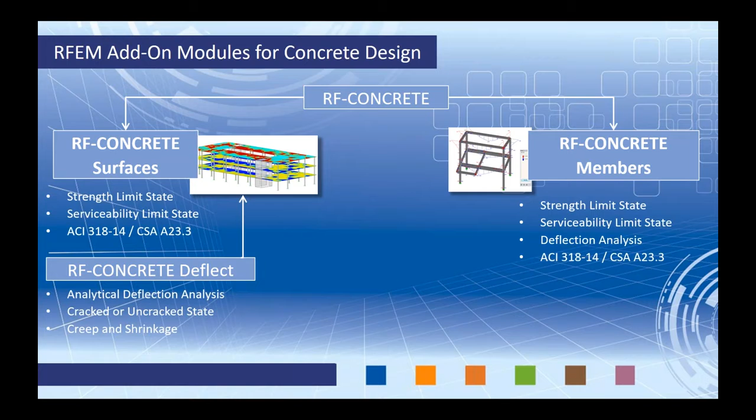Now, as I just mentioned, we do have the add-on module extension RF Concrete Deflect. RF Concrete Surfaces is required in order to activate this module extension. This allows us to take a look at the analytical deflection analysis of 2D surfaces in the cracked or uncracked state with consideration to creep and shrinkage.

And finally, we have the module extension RF Concrete Nonlinear. This is applicable to both the surfaces and members module, and this allows us to run a nonlinear calculation for the serviceability state only in the crack state. So we won't be using analytical equations or factors, but we'll actually come up with the crack section properties and rerun this within the stiffness matrix to account for those nonlinearities. We won't be getting into this today, but keep in mind that's a possibility if you're looking for it.

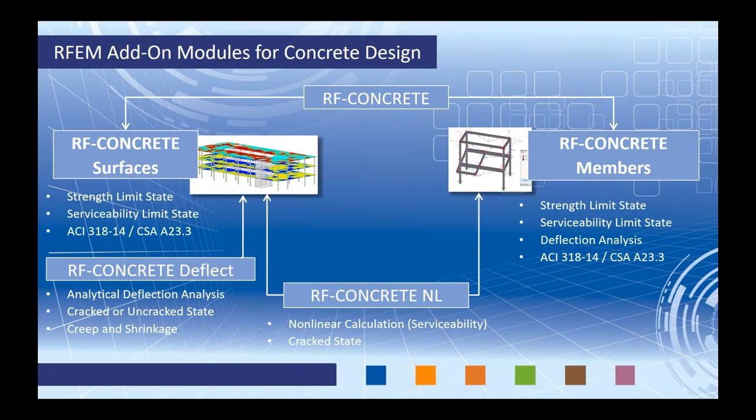So we are ready to jump into our example today within RFEM. For the sake of time, we won't be able to model the structure from scratch, but rather I went ahead and created this two-story concrete building.

You'll notice that we have several surface elements. The surface elements comprise our elevated slabs at both the first level and our roof level. Now, those same 2D surfaces are also utilized for wall elements, and you can see these in the vertical direction.

Surfaces allow you to apply any type of opening within them. So you can see this might be some type of garage opening. We have openings for our doors, for our windows, and for our stairs, and this is all accounted for within the analysis.

You'll also see these light blue symbols located at the joints where our vertical walls intersect our elevated slabs. So what exactly are these? Well, this is what's called a line release.

A line release can be placed on any line element within the model, but in particular we've added them at this joint where the walls intersect the elevated slabs. The line release type, if we open up the detail settings here, has completely released the moment, so we will not have moment transfer at that joint.

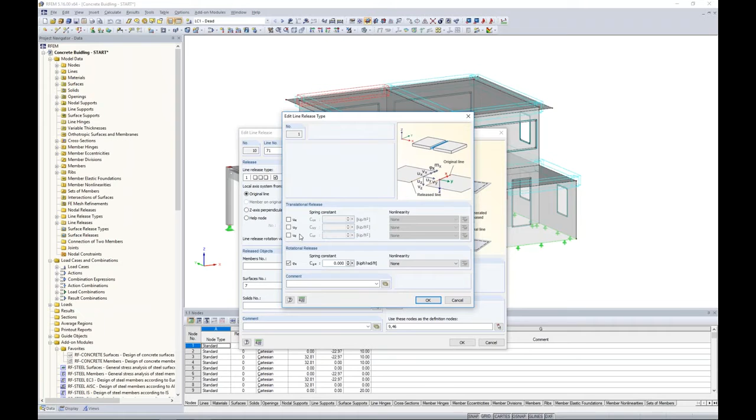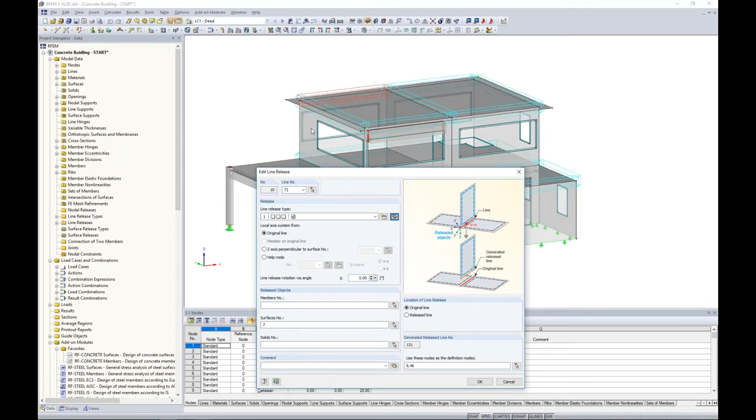You'll notice we also have translation here in the local X, Y, and Z. Keep in mind that these are the local axes of the line element itself. We simply apply it to a particular line and release the objects, and in this case it's surface number 7, my vertical wall on the other side. So now we won't get any moment transfer between those walls and the slab elements.

Under the display settings, we can scroll all the way up to the top and turn those off. They'll still be taken into effect in the background, but if it gets in our way when viewing this graphically, we can turn on and off elements like those within this display option.

Moving on to the members, also within this display in our Project Navigator, I'm going to scroll all the way to the bottom. Here we can change the graphics, the colors, according to some different elements.

The one I'm going to choose today is the member type. So the member types are 1D member elements within our software, but you'll notice they are color-coded because they are different types of members.

The first ones to notice are our columns, and these are the member type beam. A beam within RFEM is just any typical type of member, such as a normal beam or normal column, nothing too fancy going on there. That's why these typical columns just have the member type beam.

Now, in turn, we have these pink colored members, and these refer to rib elements. Looking at a rib element, we can see the member type is set to rib. We can expand the detail settings, and what a rib allows us to do is define the effective width on either side of the beam element with the slab modeled adjacent to it. Here we can set the effective width either as L/6, L/8, or manually type that in.

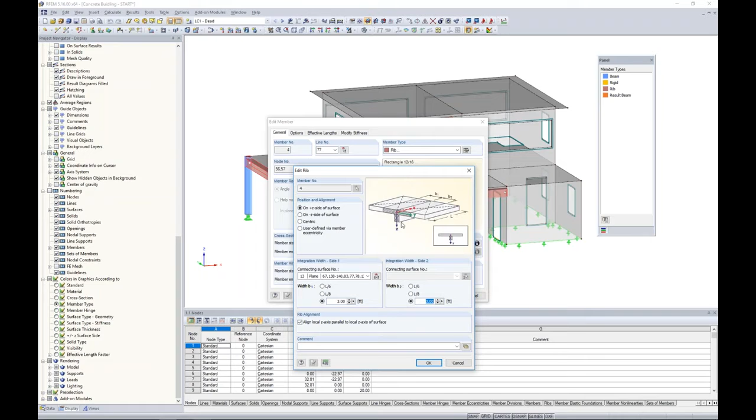But we can fully consider the effective stiffness here for the slab element with the beam, and later on we can even design this rib type member in our RF Concrete Members module.

The last type of member I want to point out is something we call a result beam. A result beam is very special in the sense that we're not actually modeling any type of beam member within this model when we're using a result beam. It adds absolutely no stiffness to the structure.

But I've placed it above this wall opening, which we can see highlighted as the wall with the opening, and I placed this result beam right above it. What a result beam does, if we double click on it and take a look at the expanded settings, is actually integrate the stresses and forces within a cuboid.

I've set this cuboid to 2 feet 1 inch in the vertical and horizontal direction. So now everything within that cuboid will be integrated and presented to me in a beam-like fashion.

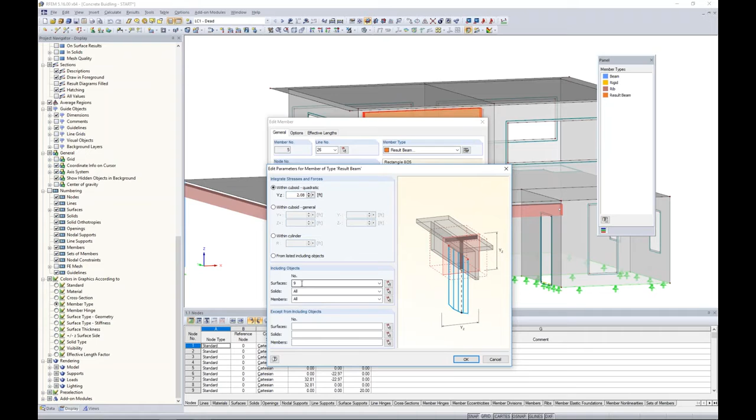We can include only certain objects. In this case, I only wanted to include my wall, surface number 9. So therefore I'll get all of the internal forces, stresses, and deflections above that wall opening, or spandrel as we'll call it, and we'll take this into the RF Concrete Members module later.

Something else to notice about result beams: you don't necessarily have to define it as a concrete member. It could be timber, it could be a steel rod. It doesn't matter because remember, we're not adding any stiffness. But the reason I've set it to a rectangular concrete material for this particular case is because I do want to take it into the RF Concrete Members module to design it later on, which does require concrete shapes and materials.

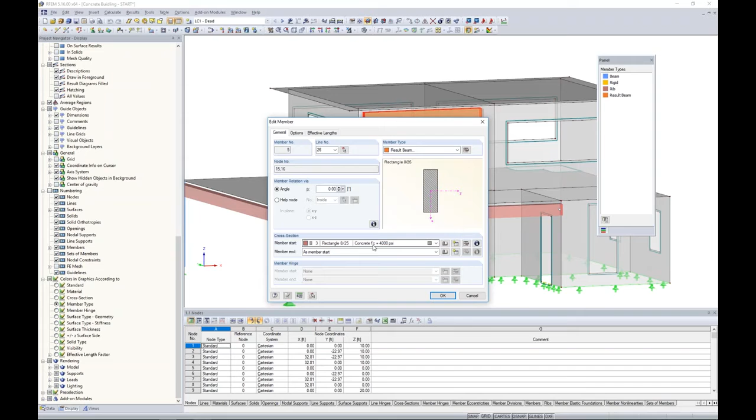Now that we have covered the basics of the surface and beam members, I want to talk about I cracked. The I cracked is simply the gross moment of inertia multiplied by a factor, and this comes directly from table 6.6.3.1.1A within the ACI. The ACI requires us to take into consideration cracked section properties. This factor multiplied by the gross moment of inertia varies for each element, whether it's a column, beam, or surface. By default, the program will automatically use the gross moment of inertia.

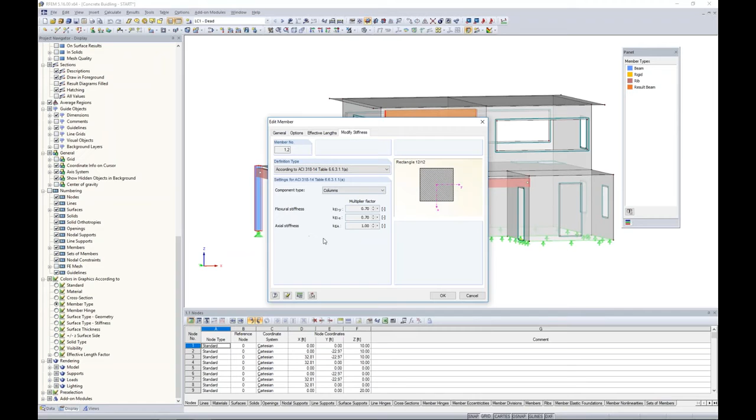So how do we go ahead and change that? I can highlight both of my columns at the same time and double click them to edit. Here we have a Modify Stiffness tab. Within this drop-down box you'll see both the ACI and the CSA, because the concept is the same for both standards. Within the ACI, I can use the drop-down box to select columns, and this multiplication factor, which comes directly from table 6 within the ACI, will be applied to my flexural stiffness. That's how we account for I cracked.

Now the same thing needs to be done for our rib elements. I can highlight both of them, choose my Modify Stiffness tab according to beams here, and the program is smart enough to recognize what type of element it is from this drop-down. We also would like to do our elevated slabs, so holding down my Control key I select all of the horizontal slab elements, edit the surface, and even for surfaces we have a Modify Stiffness tab according to the ACI for flat plates and flat slabs. We click OK, and last but not least we have our wall elements.

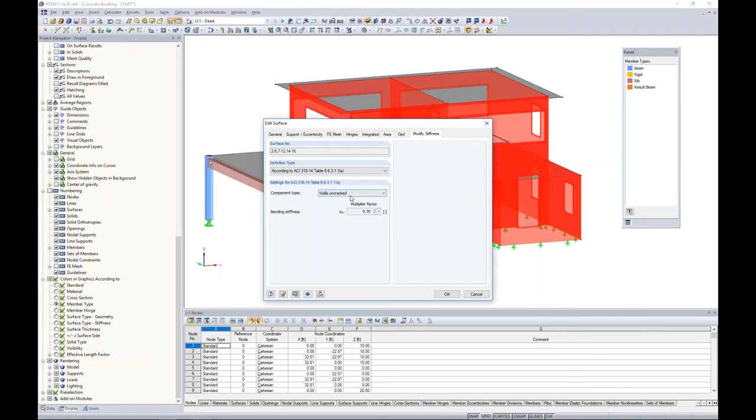I can graphically choose these with my selection box, and right-click to edit these surfaces. Again, under the Modify Stiffness tab, the program gives me the option for walls uncracked or walls cracked. We'll go ahead with walls uncracked for this example today.

Now you'll notice that I did not apply an I cracked consideration to my result beam. The reason is because we're just creating a summary of the forces and stresses within this wall panel - I've already considered I cracked for the wall, so there's no reason to also do it for a beam type element. In fact, if you take a look at the result beam, we don't have a Modify Stiffness tab anyway to make that change.

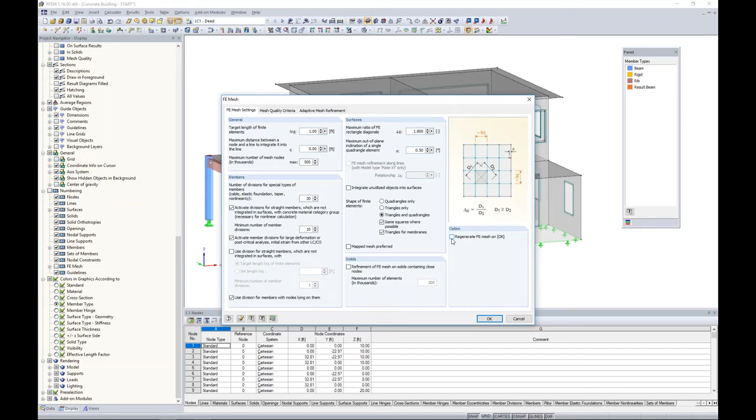One more concept to take a look at before we look at the loading, and that is our FE mesh. Under Calculate FE mesh settings, the global FE mesh is by default set to 1 foot. You can adjust this as necessary, but taking a look at the 1 foot mesh setting for example today, we can regenerate the FE mesh.

Let me turn this into wireframe view. You can see that the program automatically meshes everything for us - nodes, members, openings, everything is automatically meshed and tied together, so we don't have to take care of any of that manually. Keep in mind that you don't even need to mesh the model before you run an analysis; this will automatically always be done. I just wanted to give you an idea of what was going on in the background.

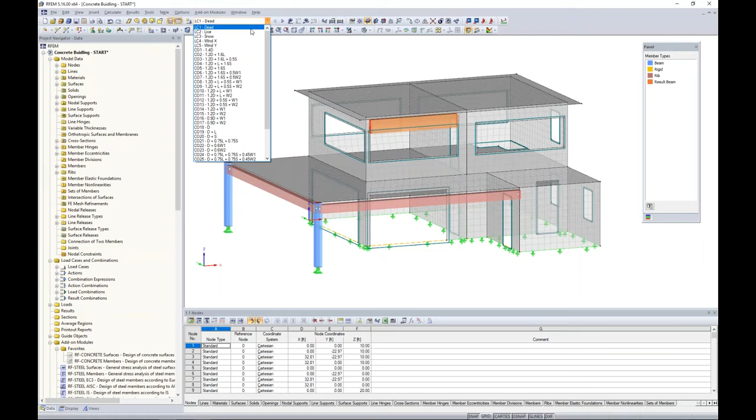Lastly, let's look at the different loads that I've placed on this structure. I've applied different loads according to dead load, live load, snow load, and so on. When we look at the loads applied to the structure, they're just simple surface loads. For dead load, you can see those acting in the vertical direction on all elevated slabs. Same concept for live load, but only applied at our second level inside the building. Snow load, I've accounted for some high drifts here closest to the wall surface bases.

Maybe we want to take into consideration the analysis for high snow loads - you can see those applied here. Lastly we have our wind loads. We can see an external pressure being applied in the global X direction, as well as some wind loads, again all surface loads applied on the inside of our structure for an outward pressure. Same concept for wind in the Y direction, except we're just rotating the directions here 90 degrees, so we have wind in the global Y direction with the surface loads applied.

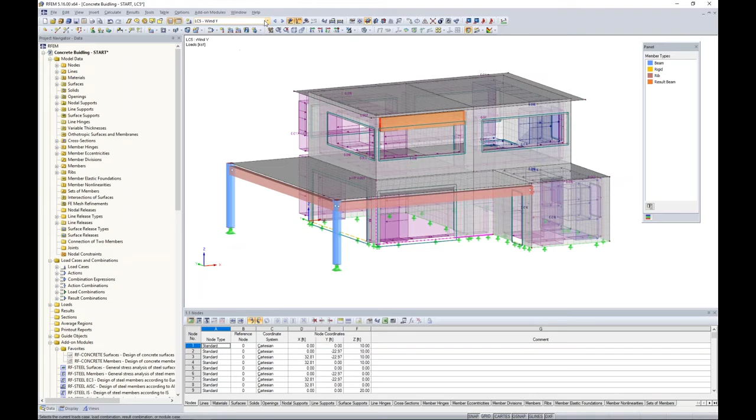Now, jumping to the load combinations, I can open up my load combinations tab. We can see here the program has automatically generated all of my LRFD load combinations, denoted by this orange color. The program has also created my ASD load combinations.

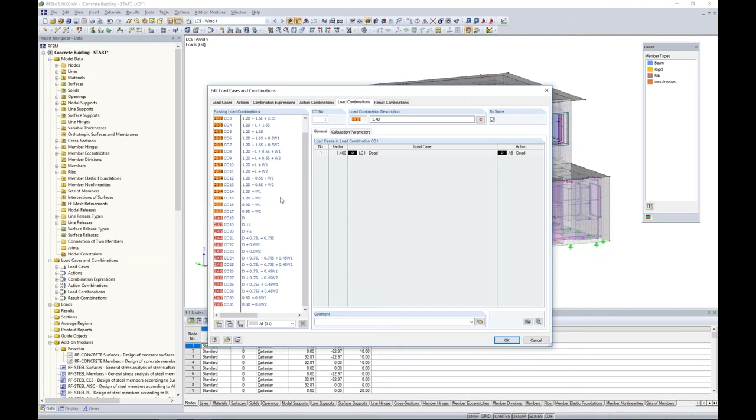Both of these combinations are going to be used later on for design within the concrete modules. But if we want to jump back to RFEM, here are all of these same load combinations available in my dropdown, and I can actually see the loads being applied stacked on top of each other, one by one within these load combinations.

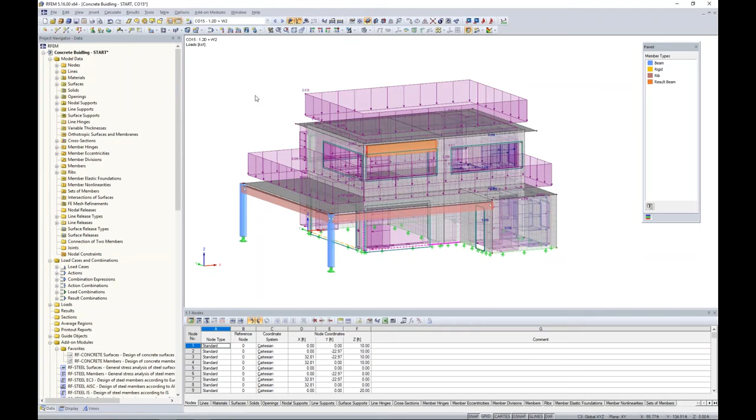The load factors are also considered here graphically. So now we're finally ready to run our analysis. What I can do is just go to calculate, calculate all.

The program's going to cycle through, first of all, my load cases and then all of my load combinations. Keep in mind, for load combinations, the default is a nonlinear analysis taking into account secondary effects such as P delta. So for every iteration, our stiffness matrix is being adjusted to account for those P delta effects. We're also taking into account those stiffness modifications from I cracked.

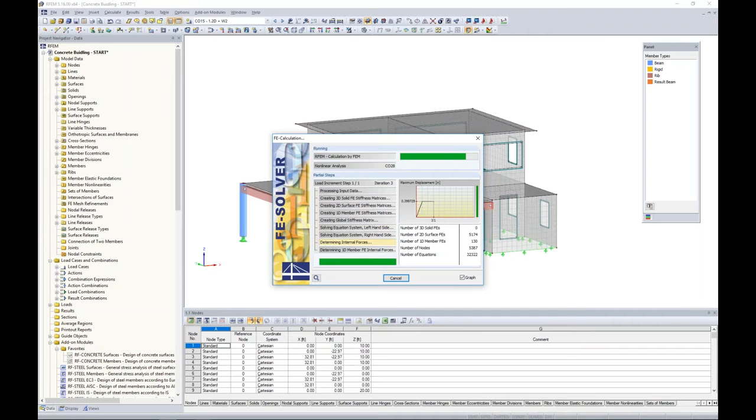Once the analysis is done running, we will be presented here with our results directly in RFEM. The results are available here under the Results tab within the Project Navigator, and we can quickly take a look at our deformations. Turning this into wireframe view, we can cycle through these different load combinations up here in our toolbar, and for the most part, it looks like gravity loads are affecting the structure.

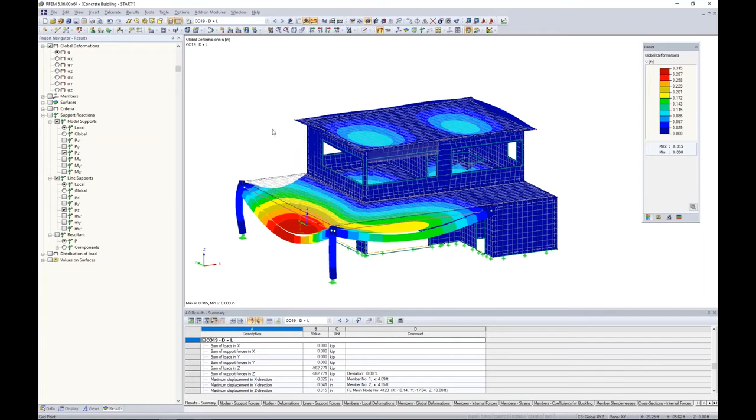Now, deformations aside, we're most likely for concrete design very interested in internal forces, especially for our members. So what we can do here is jump to the members tree within our Project Navigator to go ahead and display the internal forces. For example, I'm looking at the axial loads within my column and my rib members.

We can also take a look at shear loads. Maybe we're interested in that for those rib members. Bending moments, of course, we want to use for our tension reinforcement design, and so on.

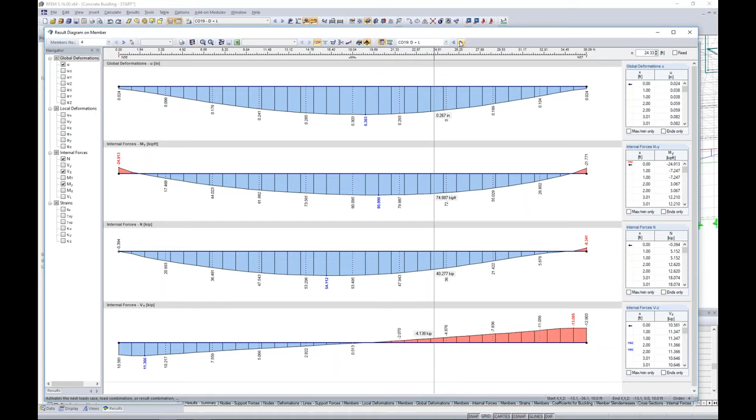We can always right-click on one of these members to go to the results diagram. The results diagram allows us to turn on these internal forces and to see a little bit more detailed look at what's going on along the member length. We can also quickly cycle through different load combinations to see how those forces are changing.

The other thing I want to point out is remember our result beam up here. Let me create a visibility by my selected object here of just my result beam. Remember that this is integrating the stresses from my wall element and presenting it to me in a beam type format. So this is actually the area above my wall opening.

I can view normal forces, I can view the shear forces, even the bending forces all along that wall segment. So again, this is what we could take, not only for the result beam, but for all beams, into our own design tools to take a look at the reinforcement design with these internal forces.

Now, the same can be said for support reactions, and let me make this a little bit more clear here. Our support reactions are given to us within this results toolbar, and we can take this into our own design tools to do the foundation design if we'd like.

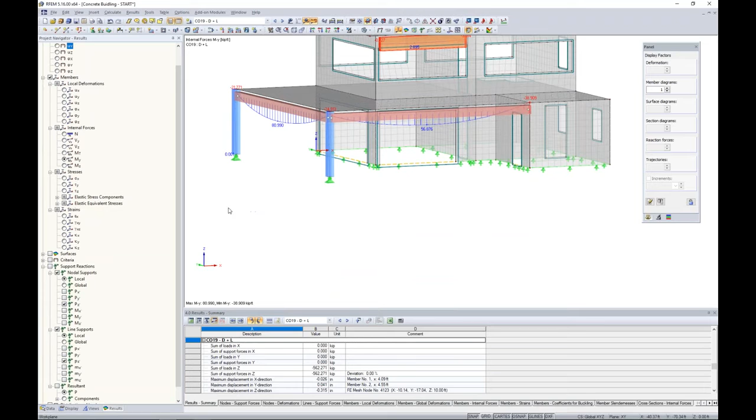So that really summarizes our analysis. Again, I haven't touched any of the add-on modules. This has all been done in RFEM alone, which provides us with a full analysis.

So now we want to change topics and jump to reinforcement design utilizing these add-on modules within RFEM. Going back to my data tab, we can see here the long list of add-on modules available. So this is why we have the concept of pay for what you use, because not all people are going to utilize all these add-on modules.

We can always right-click and move a module up to the top of the list by selecting it as our favorite. Also, under the add-on modules option up here at the top of the screen, they're categorized a little bit better, so we can see design by concrete and launch the RF concrete members module.

Now, when I say add-on module, it's nothing more than a dialog box available within RFEM itself. All of my loads, my load combinations, my cross sections, my materials are all brought in from RFEM, the main program, into this add-on module.

The only thing that we need to define here is a little bit more information about our reinforcement specific to the ACI standard so that the program can go ahead and design that for us. The first thing to note here is we want to choose the standard.

So you'll see in this drop-down box we have both the ACI and the CSA standard, as well as Eurocode and a couple others. We'll choose ACI for today.

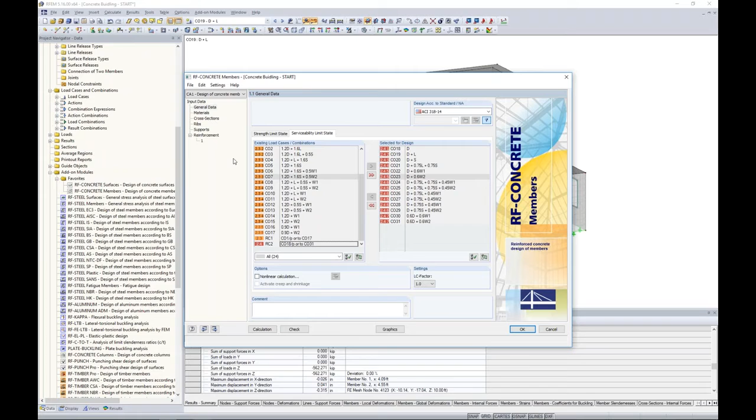Now we just simply need to move down our list here from top to bottom. So moving on to materials, concrete 4000 PSI is brought in from RFEM, our reinforcing steel is set to grade 60. Material properties are all given to us here, not too much to change.

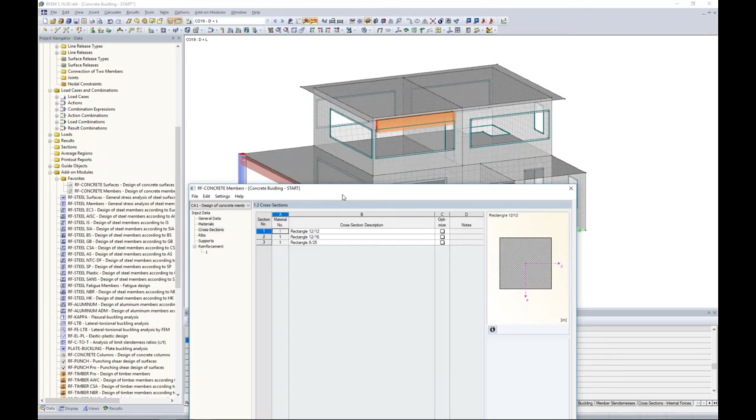The cross sections, same concept. These are my cross sections directly from the RFEM model. Now I know it's a little bit difficult for you guys to see, but as I click through these different cross sections, they are being highlighted in the RFEM model behind me, so I can see exactly which cross sections are located at which parts of the model.

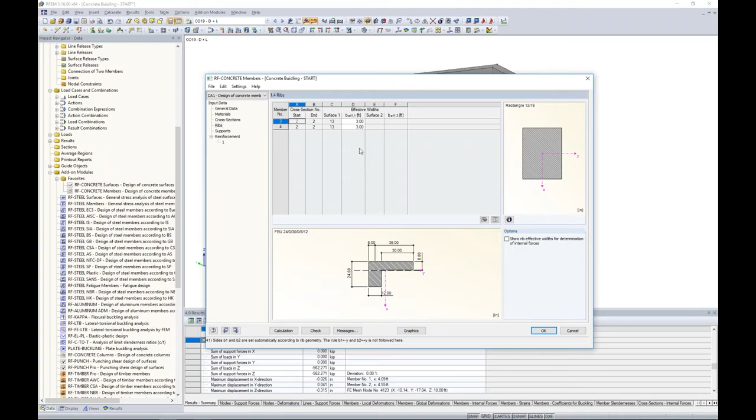The ribs tab is those rib members that we created with the effective width. Remember, I defined an effective width of 3 feet only on one side of my rib member, so that's all brought in from RFEM. Now this is important because we can do the reinforcement design of this effective width section here.

The supports tab is utilized by first graphically selecting a couple nodes. So I'm going to choose both the nodes at either end of this rib beam here in the front of my structure. The reason for that is that I want to define my support width, which in this case are my two columns. My columns are 12 inches wide, so we can type in 12 inches for the support width.

Is the column a direct support? What's nice is that this picture updates to let you understand exactly what you're selecting here, so is the column underneath the rib, or is the rib framing into the face of the column? In our case, we'll assume that the rib is framing into the side of the column.

Is it a monolithic connection, yes or no? And is it an end support? Well, in both of our cases, we'll choose this as an end support.

So the intent of this table allows us to reduce the shear forces in the support area according to ACI 9.4.3.2. The code tells us that we can actually consider the rib element at the face of the column, or even more so a distance of d away from that face, d being the depth of the rib. So the shear forces at that location will be used for the shear reinforcement design. The ACI allows us to do that, so in order to not over design the shear reinforcement, we can activate that option here.

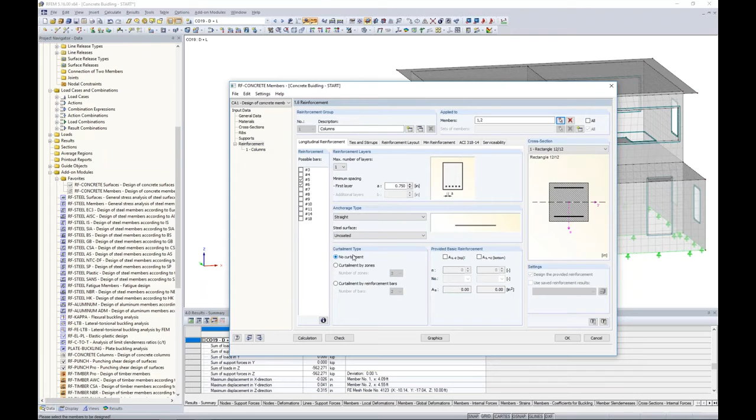The curtailment type, well what this allows us to do is specify different areas within the member length that might need additional longitudinal reinforcement. A good example of this might be our rib member.

Our rib member is going to have significant bending at the center, but much less bending at the end. So you can set different curtailment so that the program can optimize where to put that longitudinal reinforcement in different zones. The option for no curtailment will use the same longitudinal reinforcement throughout the entire length of the beam.

Ties and stirrups, same concept. We just want to choose the possible bars here. For these columns, I'm going to choose number 3s, and we're going to use uniform spacing throughout, which is the default option here. The program can also take into consideration the max stirrup spacing according to the ACI standard, so it will either flag us or design it to make sure we're not exceeding that particular code check within the ACI.

The reinforcement layout. The first thing to set here is the concrete cover. The ACI standard refers to Table 20.6.1.3.1 for concrete designation, and for number 5s or smaller that are exposed to weather, the code tells us that 1.5 inches is adequate. So assuming we're using number 5s here, we'll just keep this as the default of 1.5 inches. If the program came up with number 6s for my reinforcement, well, maybe I'd want to go back and adjust this to something more like 2 inches.

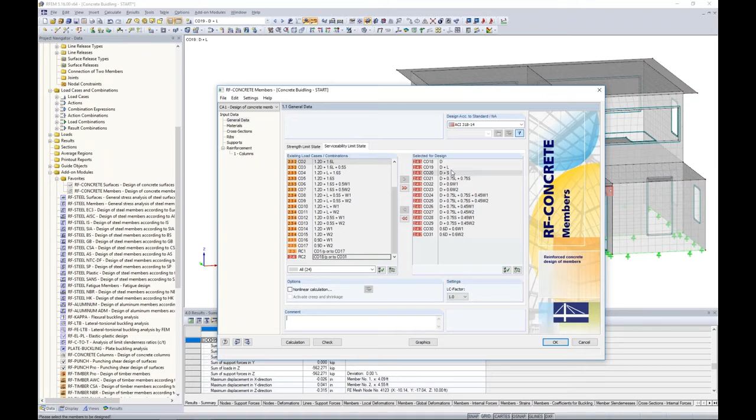Now, lastly, we have our Serviceability tab. Keep in mind, this Serviceability tab is only available because back under the General Data tab and the Serviceability Limits, I've actually utilized my ASD load combinations. If I did not have load combinations over on this right side of this dialog box, then I would not see this Serviceability tab. But today we are designing serviceability according to the ASD load combination.

So there are two considerations when it comes to serviceability: we have cracking and deflection. With cracking, the first thing to specify is the limit value for allowable crack width. Utilizing this first option, limit values, my drop-down box has a few default options, and this just comes from the ACI committee - they did some research, put together the recommendations depending on where your structure is located and how it's going to be used. For example, water retaining structures are going to have a significantly lower allowable crack width of 0.004 inches in comparison to a structure with a protective membrane or that's located in a dry air environment.

Well, for today, let's assume that cracking is not such a concern for this structure. We're in a very dry environment, we don't expect it to see very much cracking. Anyway, so we'll just set the limit values as 0.016. Now, user defined - you can manually type in the allowable crack width as well.

So below this are two different checkboxes: design without direct crack width calculation according to Chapter 24. The ACI does not specifically give us any type of equation or references when it comes to the actual crack width. Instead, it tells us that we must limit the reinforcement spacing in order to control cracking. So by leaving this checkbox checked, we will check the spacing of the reinforcement to make sure we're adhering to the ACI standard.

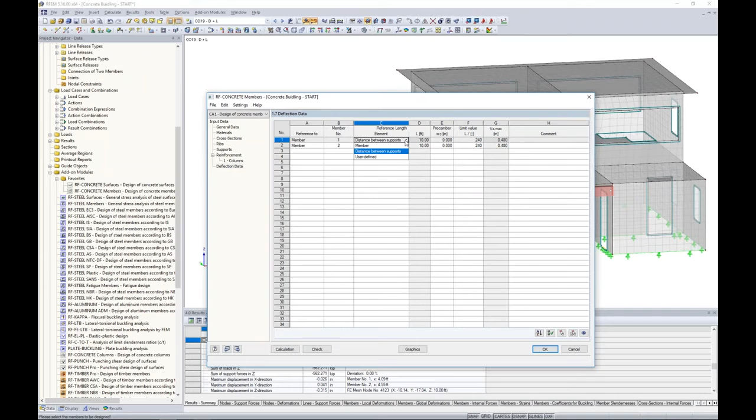Under the deflection data, not much to do here because the program already recognizes that we need to add both columns to this table, member 1 and member 2. The reference length is set as the distance between the supports, the full 10 feet. You can also modify this with these drop-down options. If we did have a pre-camber, we could put that in.

And finally, the limiting values. The drop-down box has a few options directly from the ACI standard, or you can type in your own user-defined value. Utilizing L over 240 again from the ACI, I'm now telling the program that I cannot exceed a deflection of 0.48 inches. So it will compare the demand deflections from our analysis to these limiting deflections and give us a capacity ratio for serviceability. As I mentioned, that was the bulk majority of our input information within this module.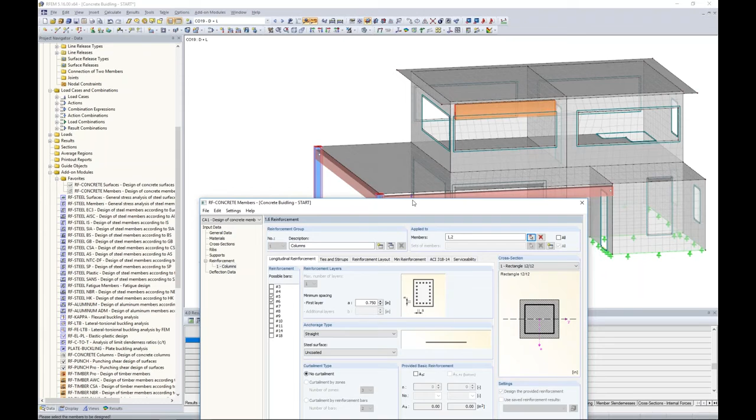Now keep in mind, this is only for the columns. So what I'd also like to do is design my ribs and my result beam at the same time. We can do all of this in one continuous step by simply creating a copy of my reinforcement group. So now my columns are defined here twice. All I need to do is go to a second group, and we'll rename this to ribs.

Now the members, I need to graphically choose my rib members to apply this to. As far as the rest of these tabs, most of this will remain unchanged. For example, the longitudinal reinforcement will still let the program optimize between number 5s or number 6s. The ties, maybe I'd like to increase this to number 4s, since I expect to see higher shear here compared to my column, so we'll increase this to number 4s.

And let's use different zones, so the program will optimize the spacing in 3 different zones. Areas where we have higher shear will have closer tie spacing. Areas where we have lower shear, of course, will have further away tie spacing.

The reinforcement layout, the cover is fine, but the reinforcement layout is not correct. We certainly don't have a column situation where we need uniformly surrounding reinforcement. So instead, we're going to choose symmetrical distribution. You'll notice now we're giving reinforcement at the top and at the bottom, which is more beam-like behavior.

For rib elements, we now have the option to distribute the reinforcement over the complete slab width. So we're also going to extend this longitudinal reinforcement over the effective width of our slab. So pretty powerful in the sense that we can design these rib elements directly within this module too, taking into account that effective width that we input in the RFEM model.

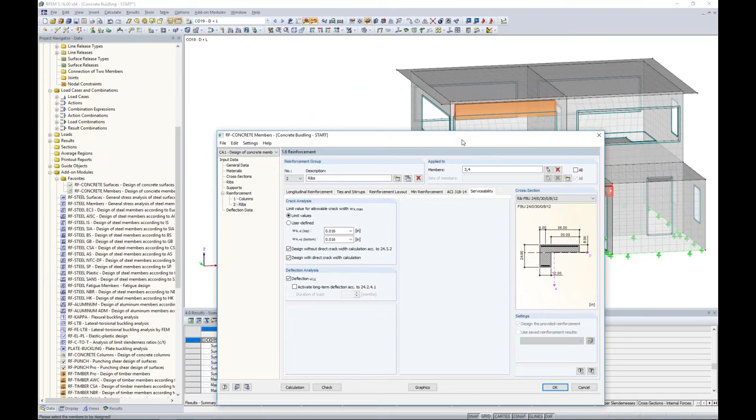Okay, and finally, we have our result beam. Remember, we're just designing the upper portion of this wall above the opening as a spandrel, and we do so by mimicking that it's a beam type element. So creating a copy now of my rib reinforcement group, you can see here now I have columns, ribs, and my third option, which we can rename to spandrel. Here I can select my member, my result beam graphically within the RFEM model.

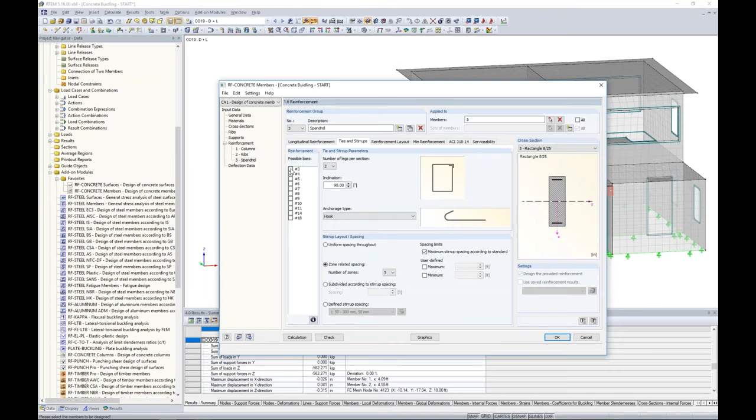And jumping back to my longitudinal reinforcement, this looks fine. My ties and stirrups, maybe we'll jump back to number 3s here with uniform spacing. Everything else remains unchanged. Even the reinforcement layout, by the way, will look the same as our rib members, but our cross section was updated here, top and bottom reinforcement.

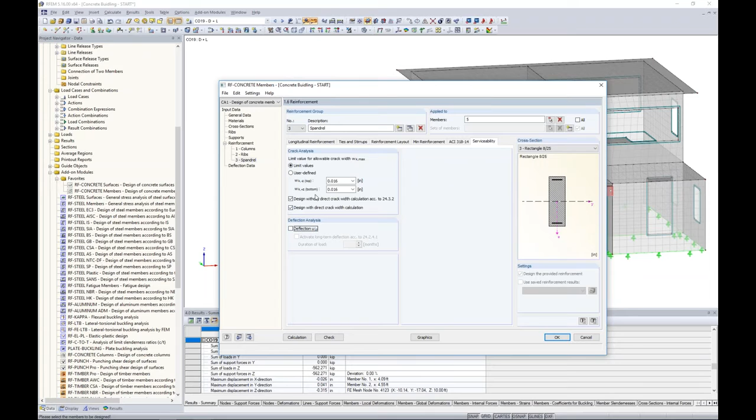The only thing I'm maybe not so concerned about is serviceability with deflection consideration. You can uncheck these options for different reinforcement groups. I still want to check cracking, but I don't really care much about deflection, so I can simply uncheck that, and now that member won't be included in the deflection data table here.

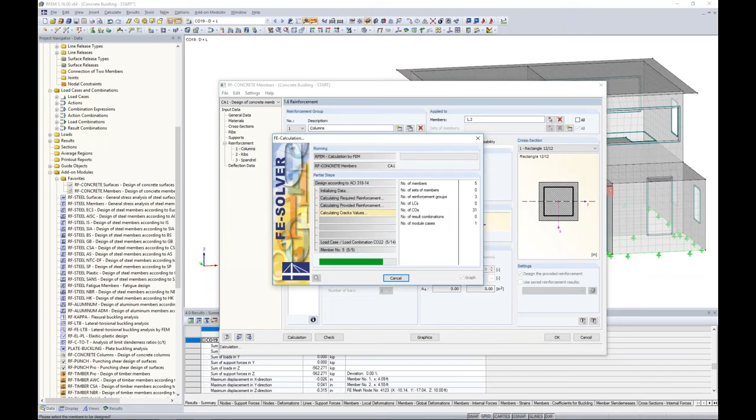Now we've finally defined all of our reinforcement settings for our members, and we can run a calculation. All this is doing is pulling the internal forces from RFEM into this add-on module and applying the ACI equations to give us our actual reinforcement details for each member. You can see it solves fairly quickly.

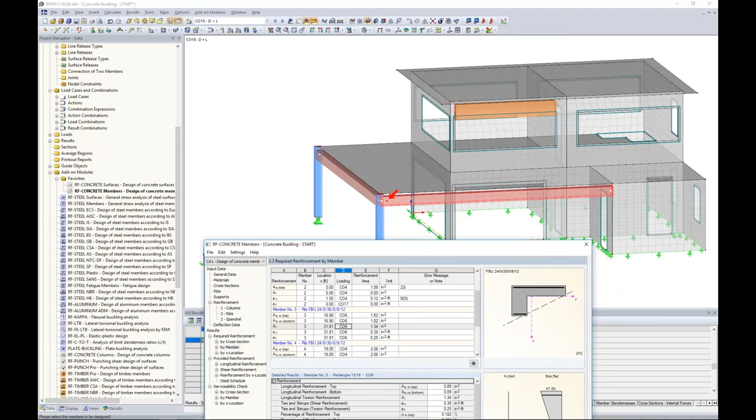Now we're presented with our results in table format. The required reinforcement is given first, and we can check it out by member. Again, these tables are synced up in the background with the RFEM model, so we can see exactly where we're at within the structure. Taking a look at our rib members in particular, we see the required reinforcement based on the applied loads for AS top given as such. Now AS bottom, this is all longitudinal reinforcement. We're also given our requirements for shear reinforcement and torsion.

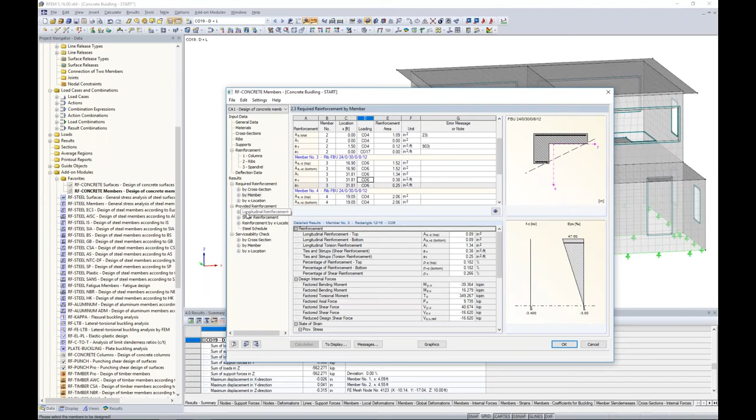Required reinforcement is nice to know, but we're probably more interested in what rebars the program actually laid out for these members based on the settings we previously defined. This is where the provided reinforcement tables can be useful. Here we can see these same members defined.

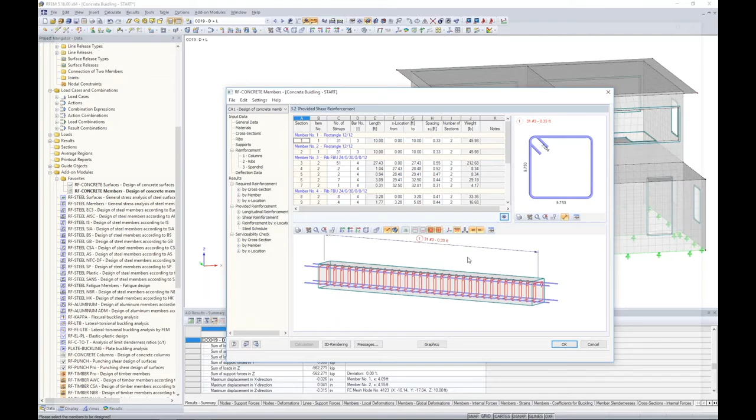For example, taking a look at the longitudinal reinforcement for my columns, and the rib members here, we can zoom in to see the longitudinal reinforcement applied at the bottom and at the top. Shear reinforcement, same concept - we can see our ties, our stirrups placed along the member length, 31 number 3s at 4 inches on center. For these 3D drawings, you can always double click on it, and up pops a nice rendering of exactly what our reinforcement looks like for both the longitudinal bars and the ties.

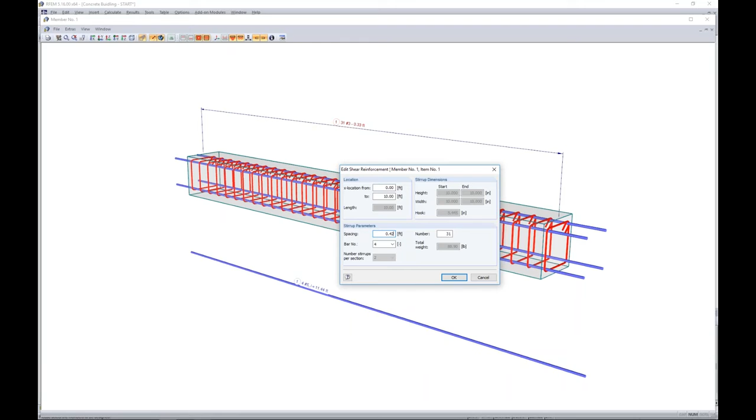If you want to make quick changes - for example, I'd really prefer to use number 4s rather than number 3s - I don't necessarily have to go back to my original input data. I simply double click on this callout, change the bar number to number 4s, and maybe increase my spacing to 0.425 feet on center. I click OK, the program automatically updates the picture. I can exit out of this picture, and when I click into another table, the program says, wait a minute, you made a change - I need to quickly recalculate this to make sure you're still meeting all the ACI limitations.

So I've made that change to my shear reinforcement for my column. It's reflected here with 24 number 4s, but I'm getting a note now, which I can read either under my messages or down in the lower dialog box, saying the bar spacing is greater than the maximum spacing. That's telling me something doesn't adhere to the ACI standard, so maybe I need to go back to my number 3s or decrease my settings there.

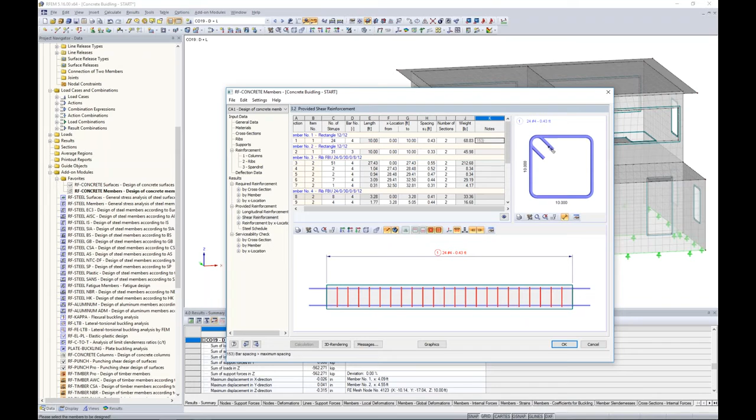Now, lastly, we have our serviceability check. Remember, we were checking deflections, and also checking the spacing of our reinforcement and crack width. Ultimately, for our different cross sections and members, we're getting a capacity here for serviceability. It looks like in this case the deflection is controlling at the mid-span, denoted by this big red arrow for our rib member, and we get a serviceability check of 0.94 - still less than 1.0, so we get our nice green smiley face.

The tables are nice, but it's also beneficial to see what's graphically going on within our module or within RFEM. So what we can do is click on the graphics button down at the bottom, and now we're back within RFEM, but still technically in this add-on module. You can see we're in RF-Concrete Members, so this is all my reinforcement results and details from the module.

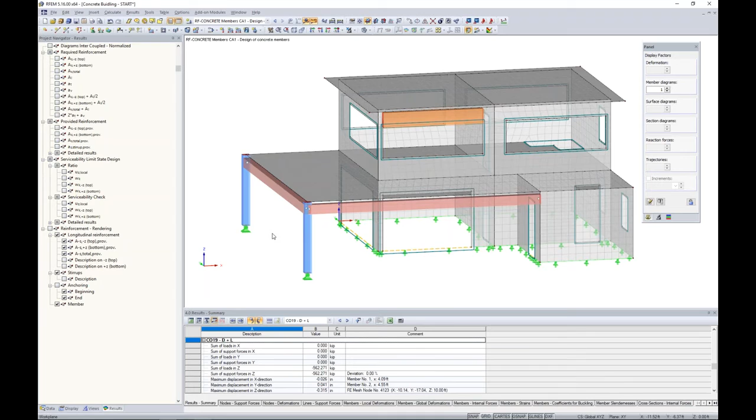Now, focusing on a rib member, we'll highlight it and create a visibility by selected objects. Let's turn this into wireframe view and zoom in a little bit. For this rib member, we can display a diagram of our required reinforcement at the bottom of the member. This member is in positive bending moment, so we need reinforcement on the bottom, up to 2.06 inches squared per foot.

So that's just the required reinforcement. Now I can overlay on top of this the provided reinforcement, which is what the program has determined to put into this beam member using number 5s, and it comes out to 3.88 inches squared per foot. You can see the provided reinforcement should always be greater than the required reinforcement, otherwise we should be a little concerned with our concrete design not meeting the minimums.

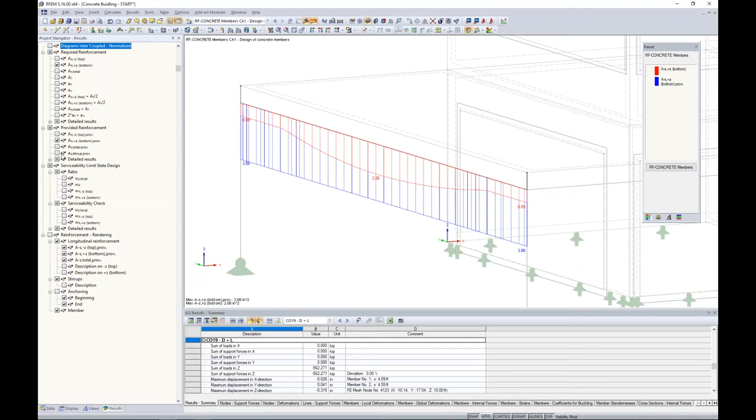Now you can go ahead and display all these different diagrams. What's also beneficial is we can display the rendering of the reinforcement for both the ties and the longitudinal reinforcement directly within the model. So we can see here, even with these rib members, we're able to see the longitudinal reinforcement within the slab. Shear spacing, our three different shear spacing zones are displayed here. Any of this can be added to our printout report for recommendations on how the overall rebar reinforcement design will be done.

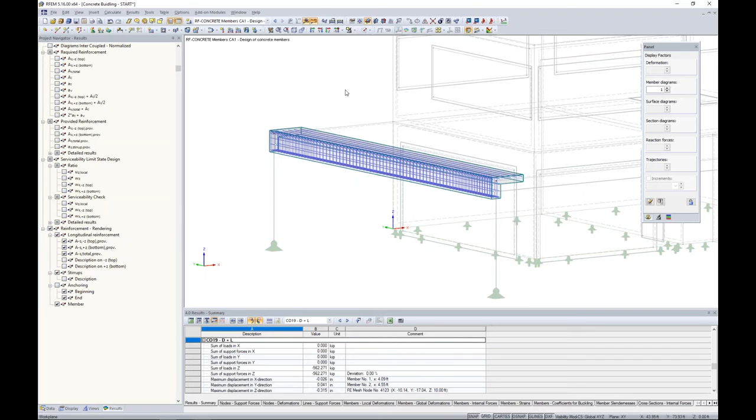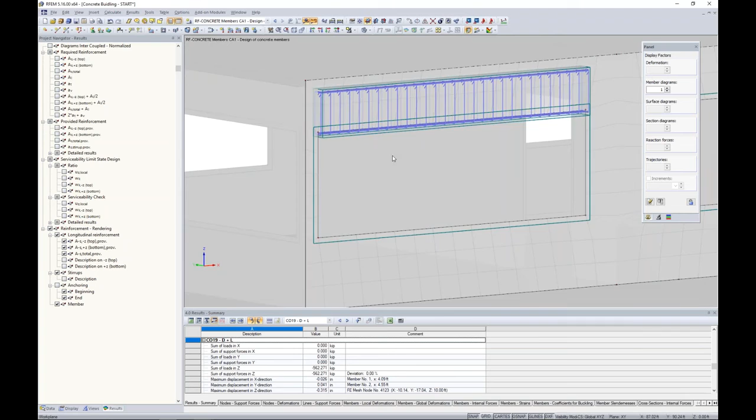Okay, the other thing to quickly point out is our result beam. We're going to cancel out this visibility mode, and highlight our result beam here along with our wall panel, creating visibility by the selected object. So here we can actually see the reinforcement above that wall opening. It was designed like a beam member, so we have our longitudinal reinforcement shown here, and our stirrups shown, and this is all meeting the design demands of this wall panel above the opening. So again, this is how result beams can be utilized along with surfaces.

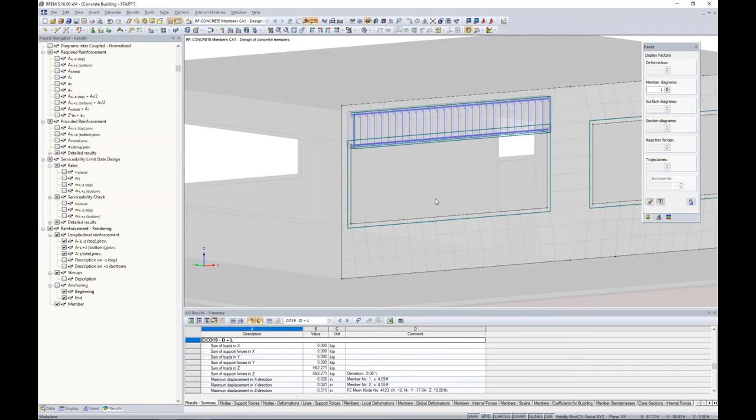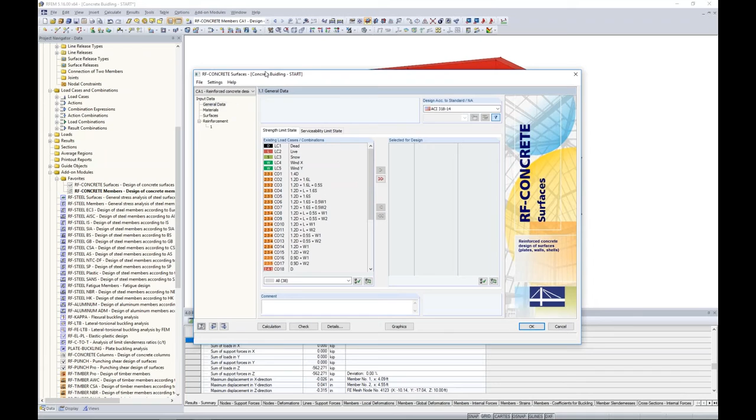Okay, so now we have completed the member design. We're also interested in the surface design. I'm going to cancel out my visibility mode, turn to the normal view in RFEM, and jump to RF Concrete Surfaces. This is our second add-on module today, and it's truly almost identical to RF Concrete Members. Once you grasp the handle of one module, you'll certainly understand what's going on in the other.

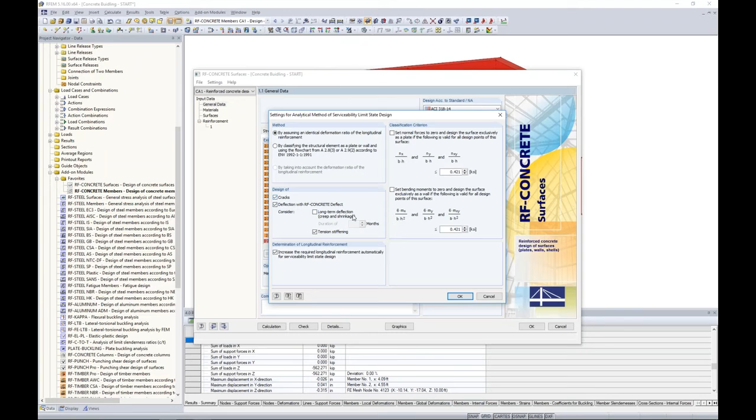We're going to choose the ACI standard from our drop-down box. For the strength limit state design, we'll choose our LRFD load combinations, and for serviceability, we'll choose our ASD load combinations. Under the serviceability limit state, we can go into these edit settings and activate the RF Concrete Deflect module, which allows us to check deflection considerations for our 2D surfaces. You can also activate long-term deflection, or turn it off here, and the design of cracks will also be included. We also can get into nonlinear analysis with the module extension RF Concrete Nonlinear, which we won't be doing today, but this is where you also activate it for the serviceability limit state design.

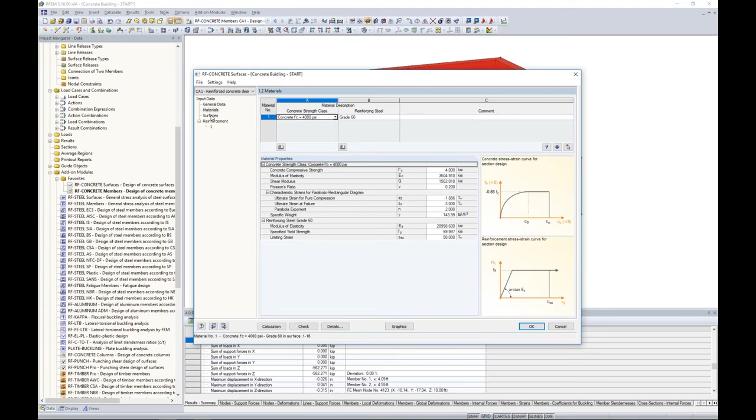So again, just moving from top to bottom with our tables here. Our materials, 4,000 PSI, grade 60 reinforcing steel, everything looks great there. The surfaces table is really effective for our serviceability design. This has information on our deformation and crack widths according to the surfaces.

The first tab here, deformation analysis, is only available because I have activated RF Concrete Deflect. Here we type in our limiting deflection ratio. You can see the default is set at L over 250, so I can manually change this deflection ratio here as well. As far as L, this will be measured by the minimum boundary line, the maximum boundary line, or a user-defined value. What I'm going to do in this case is tell the program I don't want any deflections of my slabs or surfaces to exceed 1.0, so that's the absolute deflection here. Now you can individually set deflection ratios for each surface, or apply them all at one time.

The limit of crack widths, this should look very familiar. This is exactly what we just saw with the RF Concrete Members module. We can set our limiting values here according to the ACI committee for a dry air structure of 0.016 inches. We can design the reinforcement with spacing considerations according to Chapter 24, as well as run the Gergely-Lutz equation to give us our actual crack width and compare it to the limiting value set here.

So nothing different here, moving on to reinforcement. The first thing we want to do is define our reinforcement group. We're only going to have time to do our walls today, but keep in mind the design of the elevated slabs is identical to what I'm about to show you — you just create a second reinforcement group if you'd like. This is not going to apply to all surfaces, but rather I'm just going to design these two outer perimeter shear walls here. So we can select them graphically, surfaces 14 and 15, and click OK.

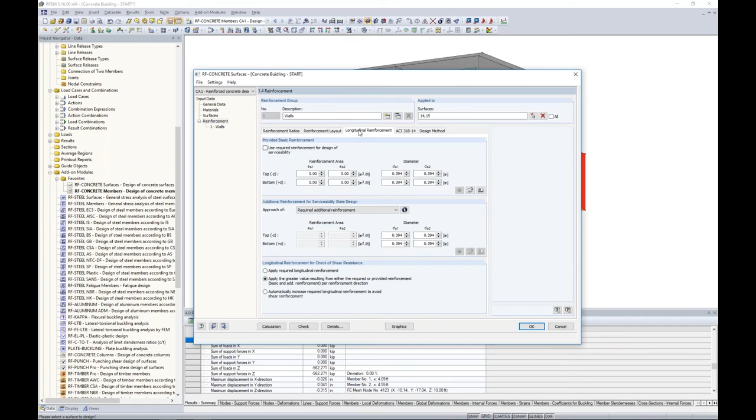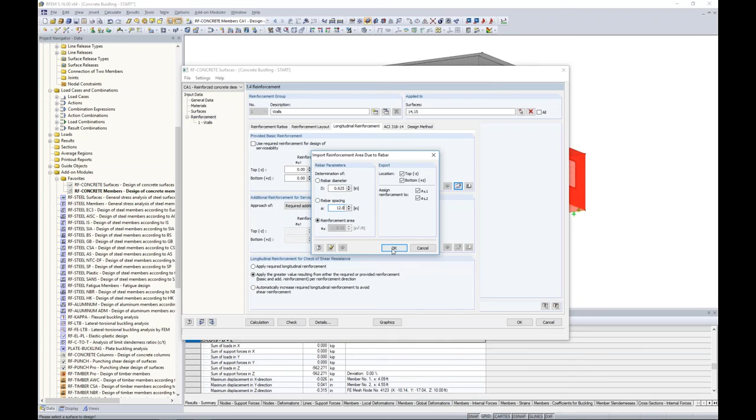For my wall elements, I'm going to apply number 5s at 12 inches on center. That's my provided basic reinforcement. I can input that information for top and bottom, as well as the diameter of my rebar, but we can also use this helpful tool. With this tool, I can choose all options for top, bottom, and both directions, specify my number 5 rebar diameter of 0.625 inches, and set my rebar spacing as 12. Once I click OK, the program automatically calculates my reinforcement area and sets my diameter according to those settings. Nothing further to do with my number 5s at 12 inches.

Now these next two settings are interesting. The program will first run through the ultimate or strength limit state design. If it determines my number 5s at 12 inches are not adequate, it will automatically increase this reinforcement, and this becomes our new required additional reinforcement. Once the strength limit state design is done and we move on to serviceability, what do you want the program to use? Do you want it to use our number 5s at 12, or the required additional reinforcement? All of those options are available in this drop-down box. I'm telling the program that if number 5s at 12 are not adequate, go ahead and use whatever additional reinforcement it's suggesting we add to these wall segments.

Same thing with the check of shear resistance: apply the greater value from either the required or provided reinforcement.

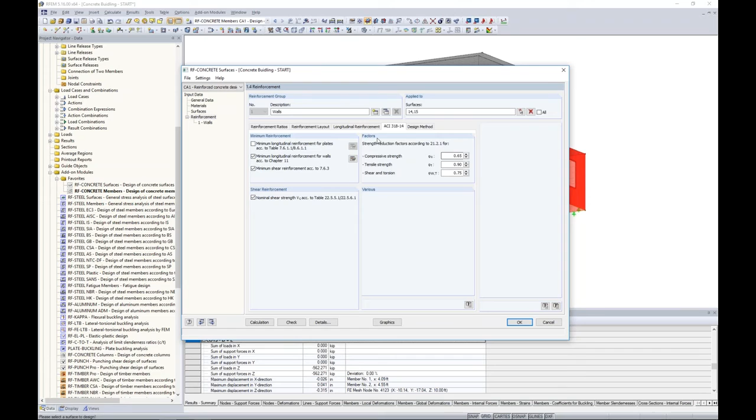The ACI tab just has some references directly to the standards. For example, we want the minimum longitudinal reinforcement for walls according to Chapter 11. Minimum shear reinforcement is given here, as well as the nominal shear strength of our concrete according to Chapter 22. Strength reduction factors from Chapter 21 are given by default directly from the ACI, but you can adjust those here.

The design method will leave this as the default. We have optimization of design internal forces, and the parentheses give you the information you need: this is recommended for parts loaded mostly by bending or tension, compared to parts loaded by pressure. So we'll go ahead and leave this option here.

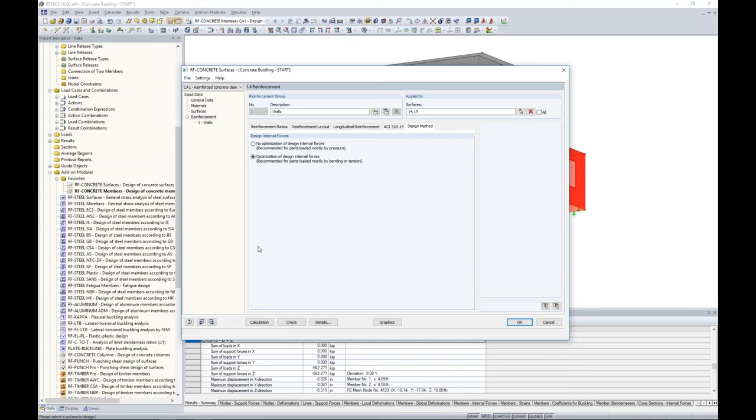So now we're finally ready to run our calculation. For the sake of time, I'm going to jump to an already solved model, since we have several FE elements now, much different than our members. It just takes a minute to solve, so for the sake of time we'll jump to the results, which are provided within this add-on module with the results tables.

The first thing I want to look at is my required reinforcement by surfaces. Once I run my calculation, I see my two surfaces listed here. The first one is surface number 14, on this far side back here. Surface number 14 shows me my required reinforcement within this column, based on the applied forces. Basic reinforcement is my number 5s at 12 inches, which is what I told the program to input. My third column is all zeros, because my number 5s at 12 inches are completely adequate for this wall, so I don't need any additional reinforcement. My number 5s at 12s are fine.

I could maybe even consider increasing the spacing or decreasing the bar size to be a little bit more competitive here.

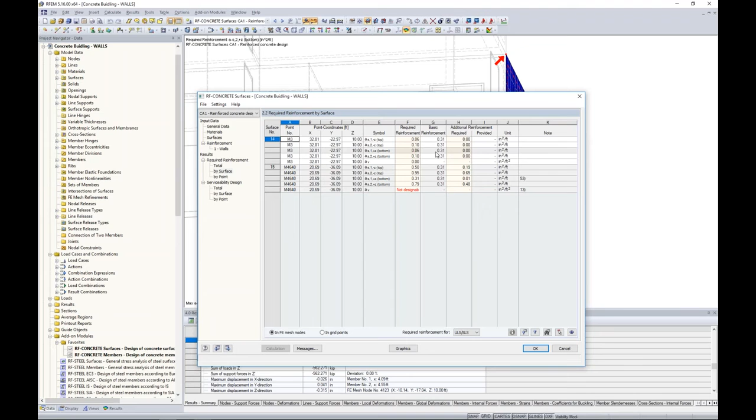Now, looking at wall segment number 15, it is a very different story here. Looking at the required reinforcement, I have values clear up to 0.95 inches squared per foot. That's a whole lot of reinforcement.

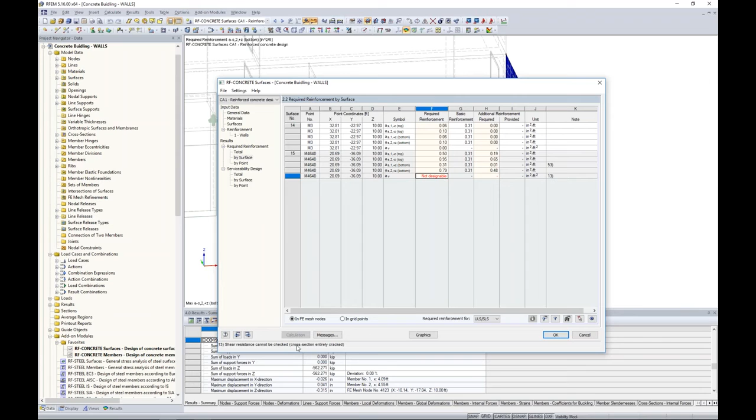My number 5s at 12 inches listed in my second column here are not even going to be close to this. So in my third column, the program's telling me you need to put quite a bit more reinforcement into this wall. Then if I take a look at my shear reinforcement design, the program's giving me a not designable message. It says down here in the bottom, the shear resistance cannot be checked. The cross section is entirely cracked. Well, this raises a red flag to me.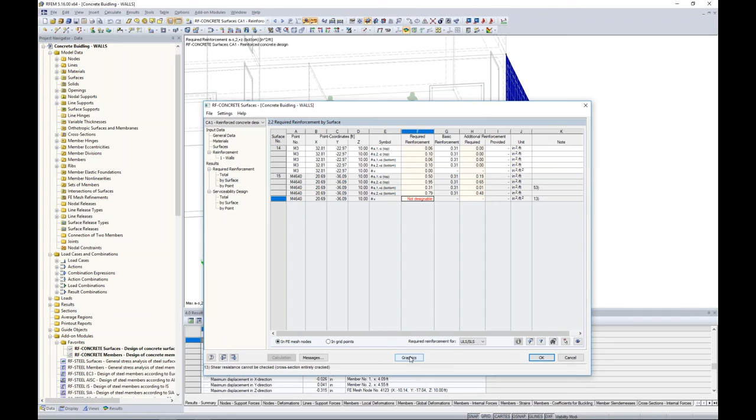These two wall panels are very similar. Why is wall number 14 passing with flying colors? Everything is totally content with the number 5s at 12 inches, but then when I look at number 15, it's not even close. It's failing by quite a bit. So this tells me that I need to maybe take a look at my graphics within the RFEM model here to see what's going on.

Remember, I'm still in this add-on module, RF Concrete Surfaces. I'm just viewing my results graphically here back in RFEM. So we'll take a look at our required reinforcement, which I can choose within my tree here. And now I'm viewing the required reinforcement for both the top and bottom and in both directions. We can see the direction indicated by the red arrows there.

You'll notice as I cycle through these, the wall panels themselves, for the most part, require very little reinforcement, but we definitely have a problem up here in this corner. Very, very high reinforcement is required. So this tells me that we have an issue called a singularity.

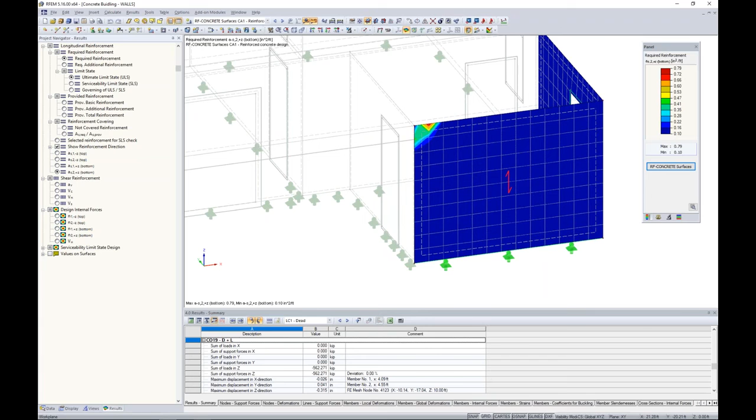Now, if we look at this corner here of this wall panel, we have this additional wall panel framing in from 90 degrees. Remember, we have our rib member framing in all to this teeny tiny FE mesh point in the corner. Well, in reality, this is not just an issue within RFEM, but with all finite element analysis software, that the load isn't going to be distributed at this one single little mesh point, but rather we're going to have better load distribution in real life.

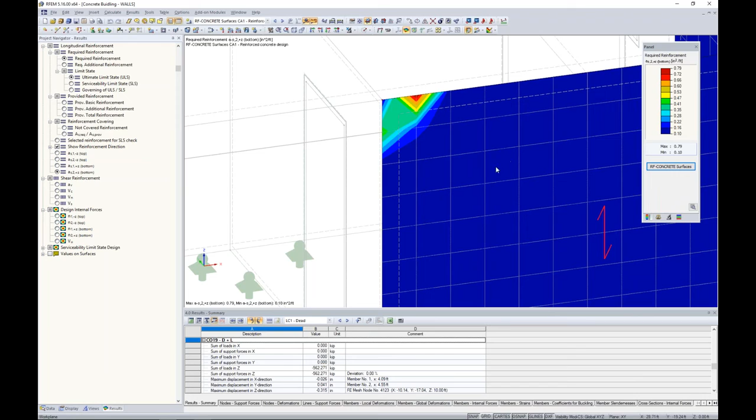So what can we do in our model to take care of these high peak areas? Well, the first thing to know is that my FE mesh elements here are pretty large at 1 foot. So maybe I want to refine my FE mesh at this corner point.

Well, I can do this by right-clicking on the node. I can edit or create a new FE mesh refinement. I choose the definition type here, and you'll notice the program already chooses the node option because that's what I've highlighted in the model. I'm going to give the FE mesh refinement a radius of 3 feet. Now, on the inner side of this FE mesh refinement, I want 1 inch. And then as the outer mesh refinement, I would like it to transition back to my global settings of 1 foot. And I click OK.

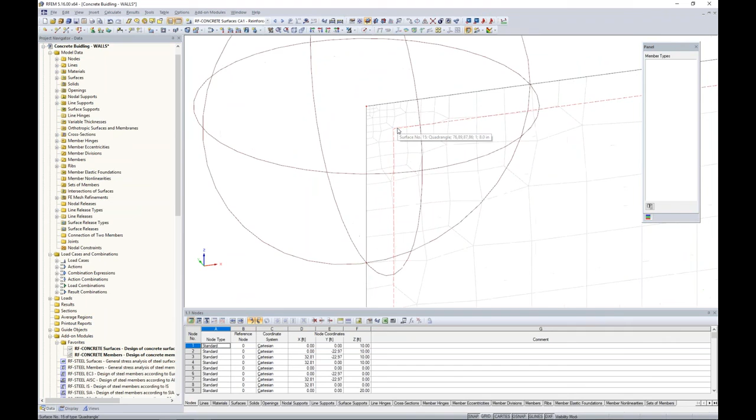Program tells me it needs to clear the results. So now we're presented with this FE mesh refinement symbol here. I can go to calculate, generate FE mesh, and maybe if I hide my objects in the background, we zoom in here, we can see that the FE mesh is much smaller at this corner now. Then it transitions nicely back into that 1 foot setting. So some nice automated features here.

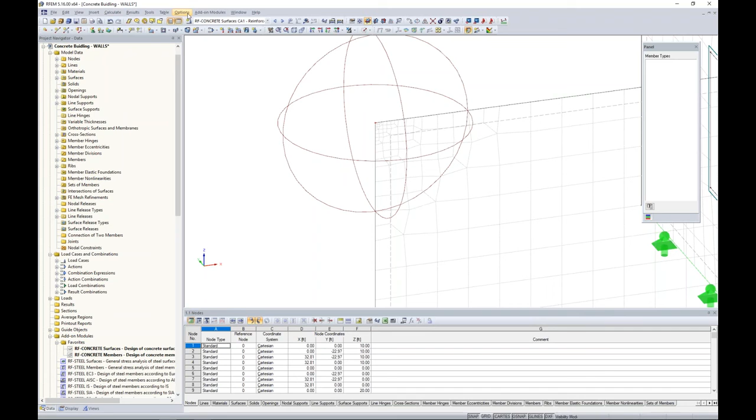But because we've completely changed the FE mesh, the program does need to rerun the analysis way back in RFEM. Our internal forces are inevitably going to change when we make changes to our FE mesh. So I'm going to go to calculate, calculate all. And again, for the sake of time, we'll just jump to an already saved model here. So now I'm presented with my results after I place this FE mesh refinement in RFEM.

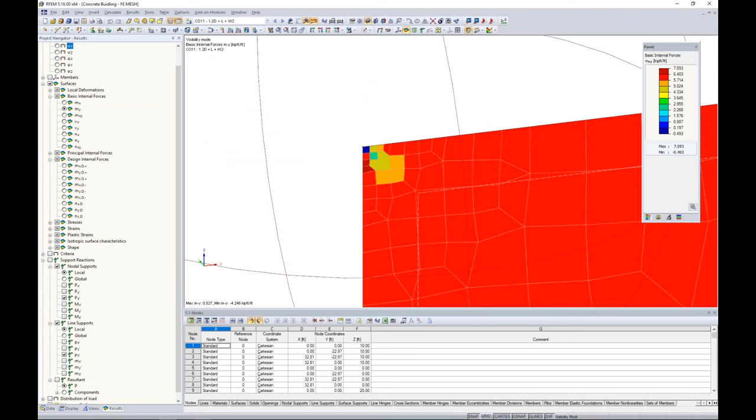So we've refined the FE mesh, but how do we get better distribution over these high peak areas? Well, under the Data tab, we have a nice feature called Average Region.

If I right-click on Average Region to create a new average region, this allows me to specify which surface I want to apply this average region to. I can click on the wall panel itself, surface number 15.

I want a circular average region, so the picture updates nicely here. I choose where to place this average region, which we'll place right here in the corner, and the nodes are automatically entered with the correct coordinates into this dialog box. The dimension will be 3 feet, so 1.5 radius is what we'll consider.

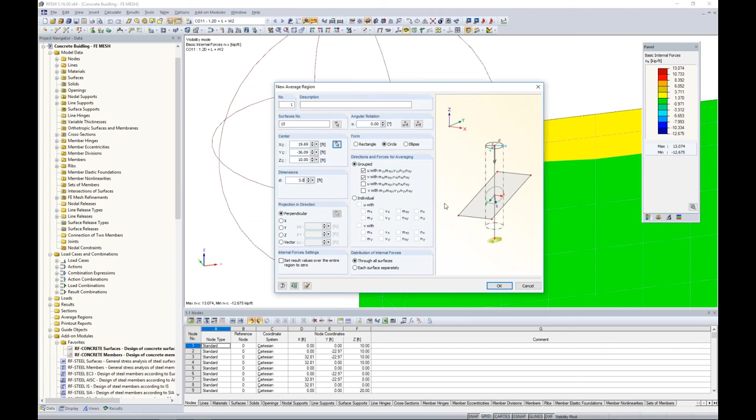The program is going to automatically average out the results within this average region, so I can click OK. Now I don't even have to rerun my analysis - the program can automatically average out those regions.

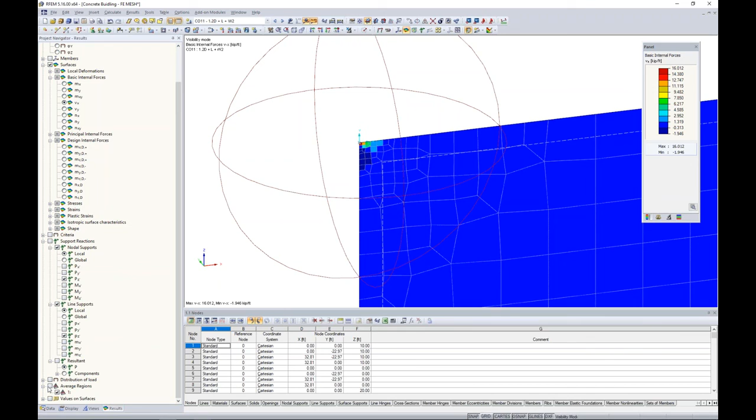So now when I go back to my internal forces for shear, without the average region, we have a shear force of 16 kips per foot. Now I can activate this average region at the very bottom of my results panel here. My shear went from 16 kips per foot to 0.44. That is a significant drop.

Average regions can be incredibly useful for regions where we're dealing with singularities, and the same goes for any one of these internal forces. So now we've taken into consideration better load distribution, or averaging out those high peak areas.

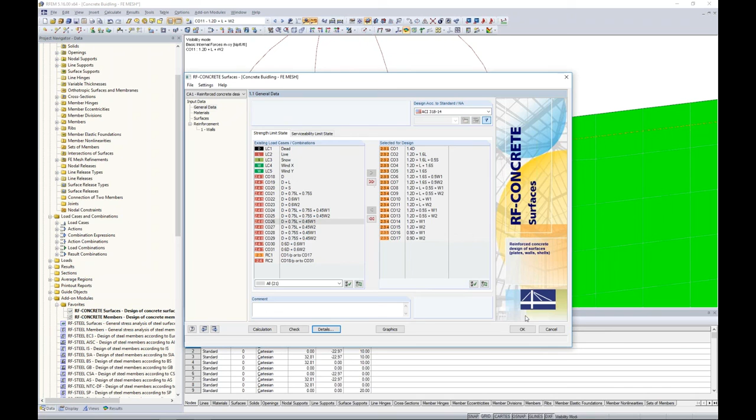So we've done that for RFEM, but keep in mind that under the RF Concrete Surfaces module, the program will still automatically use those high peak areas unless we go under the Details tab and choose this option to apply the average internal forces for ULS and SLS calculation. Now the program will use those averaged out internal forces to do our reinforcement design, and we're ready to rerun our calculation.

I already have the results saved here within the RF Concrete Surfaces module, taking into consideration the average region, and now we can see much more realistic results for my second wall panel. For surface number 15, here is my required reinforcement - we're no longer seeing 0.95 inches, but the greatest area we're seeing is 0.3 inches squared per foot.

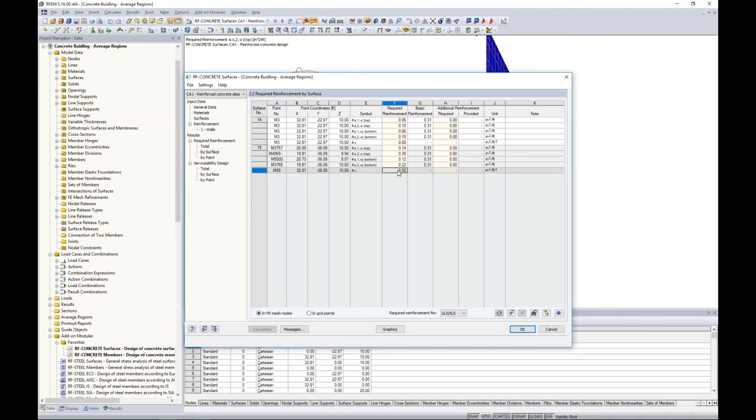Now my number 5s at 12 inches are completely adequate. I don't even need any additional reinforcement here. Even my shear reinforcement - I don't need any shear reinforcement. What I provided in the program is adequate. I don't have any non-designable errors telling me the entire cross-section is cracked.

Now, lastly, we can view this information graphically again, and take a look at the required reinforcement in the different directions. By all means, we still have these areas with higher internal forces, which is fine - this probably stems from our rib and our panels framing into it behind this particular wall. But we're not looking at 0.95 inches squared per foot anymore; we're looking at a max of 0.3 inches squared per foot, which is much more realistic.

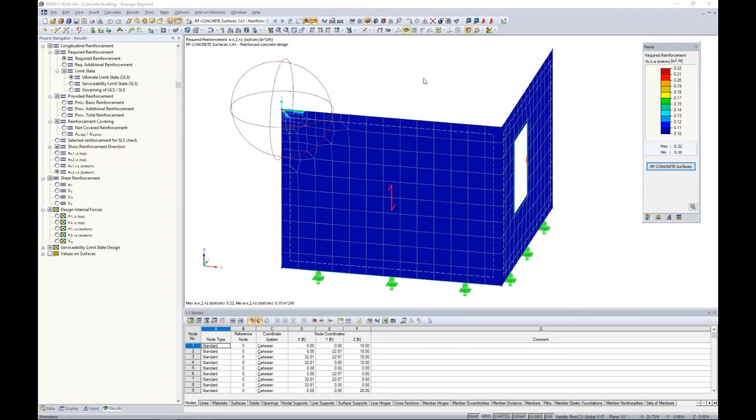Okay, so that really summarizes, rather quickly, member and surface design within RFEM. So at last, we can jump to the PowerPoint to go ahead and conclude today's webinar.